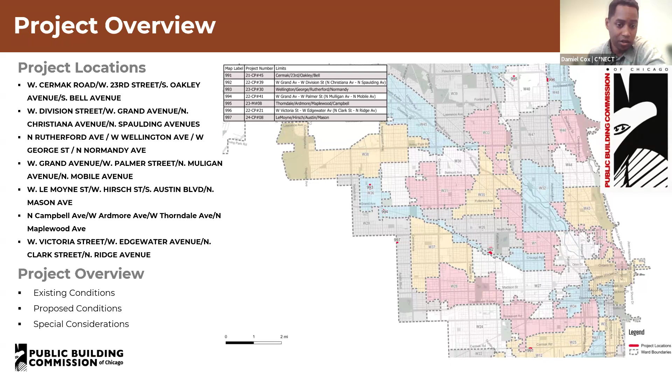Next, we'll start our technical review portion of the meeting. And I am going to turn it over to Damiel Cox, again from Connect, and he is the engineer of record, or the EOR, for CDOT. Damiel? Morning. So we have 7 alleys that we're going to go through. It's pretty hard to see, but every red dot is the representative location of where these alleys are located. You can go to the next slide. Okay.

Okay, the first one is Cermak Road, West 23rd Street, South Oakley Ave, and South Bell. What you'll see for a majority of these alleys is deteriorating pavement. Utility poles will also be located within the right of way. We're not doing anything with those. And then for this specific alley, it's mainly residential use.

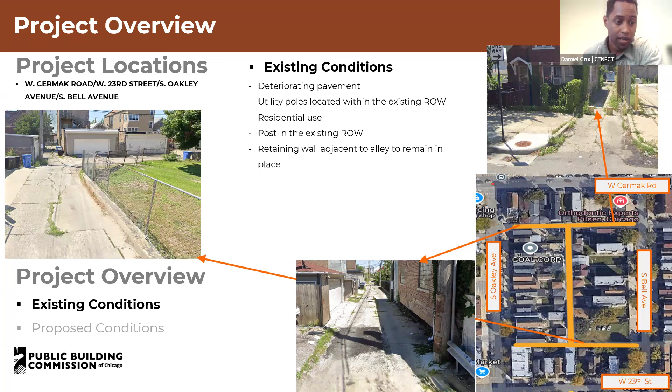We are proposing catch basins, manholes, and we are also using extra strength vitrified clay pipe along with ductile iron pipe. We will be tying into South Bell Avenue. So you can see it's from, did I not mention that? Oh yeah, we're connecting a 10 to a 12. So we will need a Y connection here.

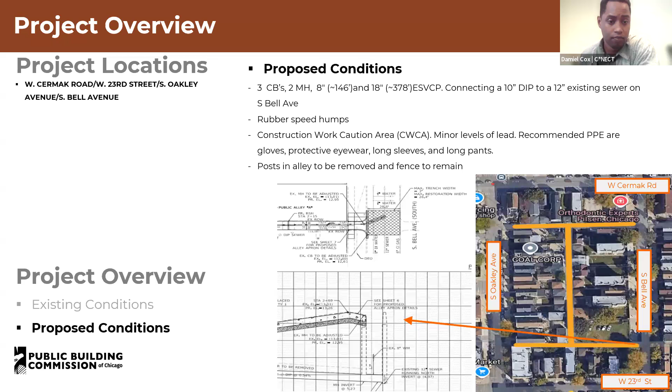No alleys on this list will be brick paver, just a heads up. You can go to the next one, D.

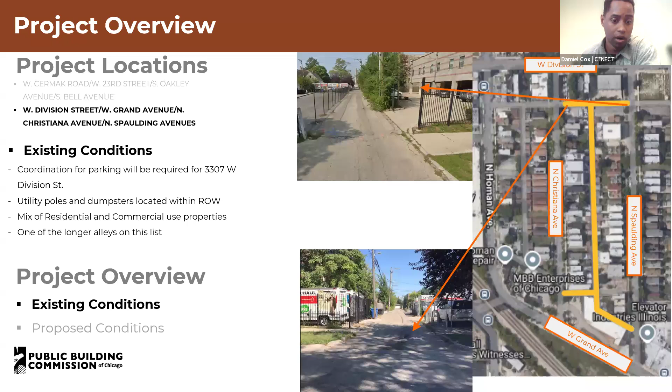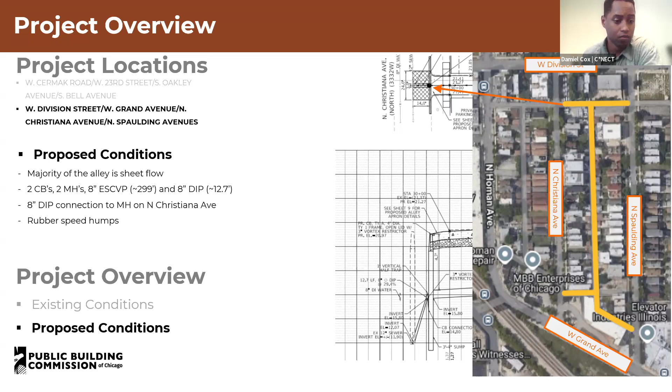Next slide. All right. Majority of this alley is sheet flow. We will have some extra strength vitrified clay pipe with some ductile iron pipe as well. We will be connecting to Christiana with 8-inch, and I think it's hard to see here, but we will be connecting the 8-inch to a manhole. Next slide.

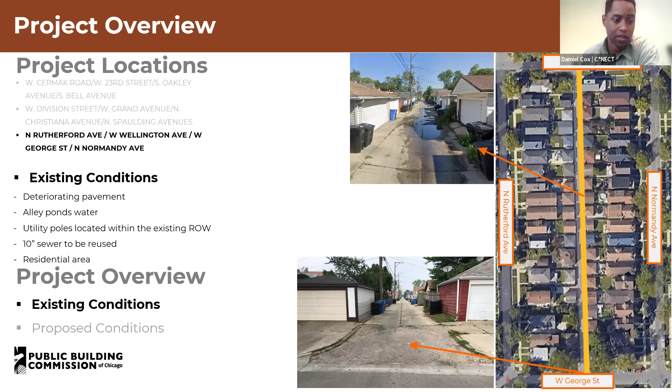Rutherford, Wellington, George, and Normandy. Similar to the other ones, deteriorating pavement. This alley is ponding water. It is noticeable on rain days. We will be reusing the existing 10-inch sewer, primary residential area. And then we're just proposing removing 2 catch basins and 2 manholes and adding some speed humps.

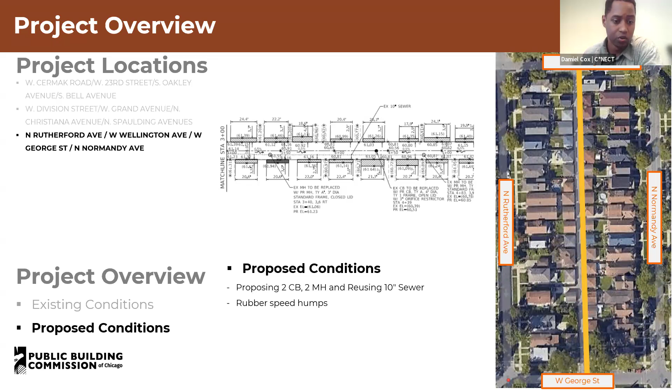Grand, Palmer, Mulligan, and Mobile. This alley is a mix of residential and commercial. Similar to the other ones, there are existing utility poles. On the topic of utility poles, if you do notice any of them deteriorating, since some of these photos were taken about a year or so ago, please let us and ComEd know as soon as possible. The earlier the better. You may notice some potentially leaning, but from our initial inspection, that was not present. But if you do notice this, if awarded with the contract, please let us know.

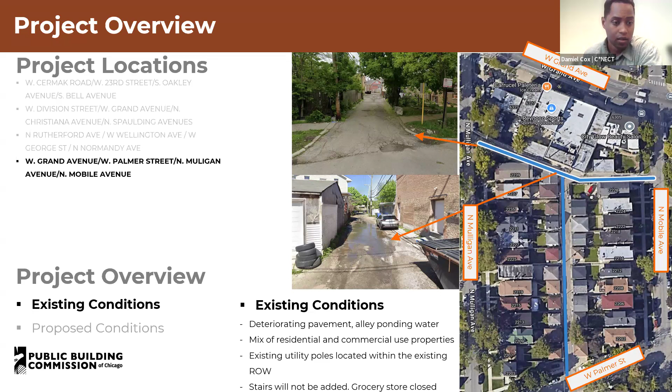Next slide. Proposing to use 2 manholes here and then replacing a 10-inch pipe with 30 feet of 10-inch extra strength vitrified clay pipe. Sewer lining will be needed here, so we will have some coordination with the water department, ideally so they can do it beforehand.

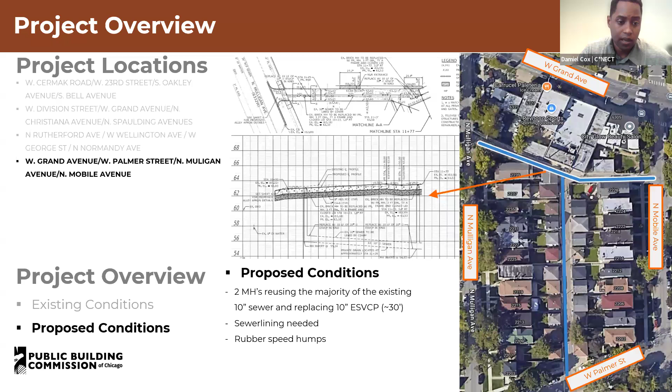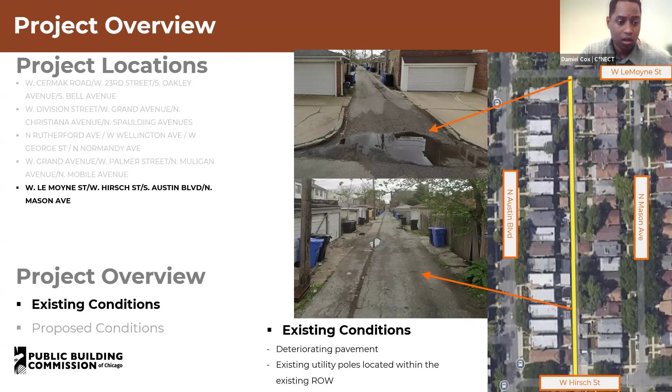Next slide. And then Lemoyne, Hirsch, Austin, and Mason. This alley is pretty straightforward, just deteriorating pavement. Alley is ponding water. Next one. We'll be introducing a manhole, 4 catch basins and then about 464 feet of extra strength vitrified clay pipe. And then we will be making a connection onto Hirsch Street, 8-inch to a 30-inch sewer.

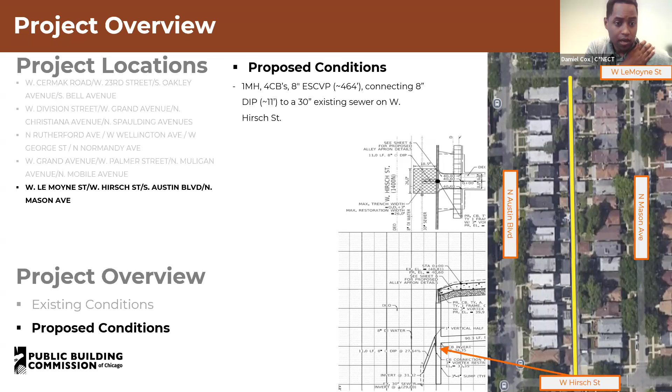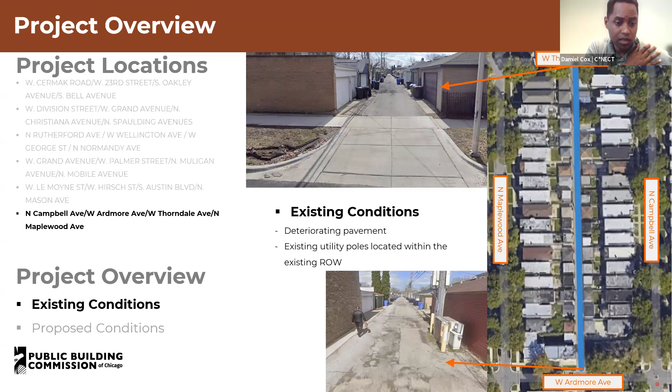Campbell, Ardmore, Thorndale, and Maplewood. Deteriorating pavement along with the other ones. Not much else to speak on here besides the photos you can see. This is the condition of the alley. And we're proposing 12-inch extra strength vitrified clay pipe along with connection of an 8-inch to a manhole on West Ardmore Avenue.

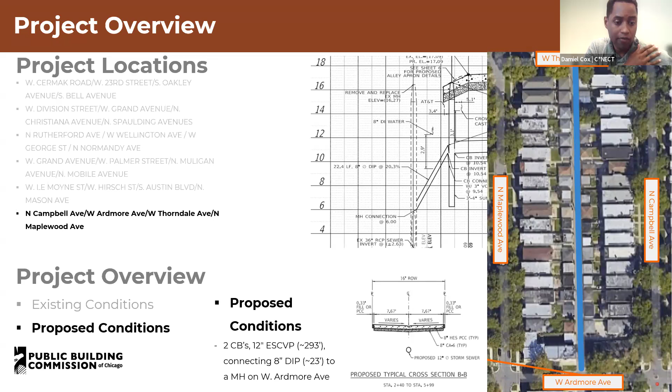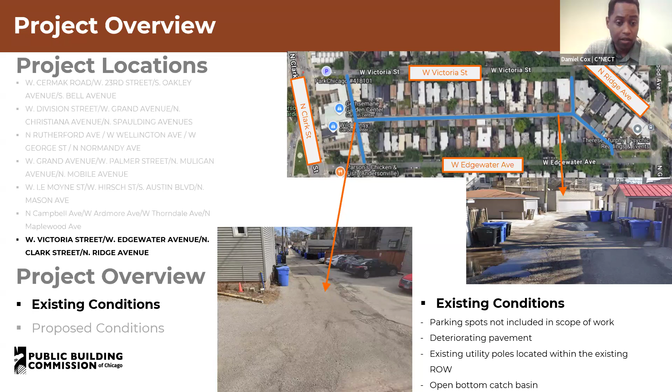Victoria, Edgewater, Clark, and Ridge. There is a parking spot not included in our scope of work in this alley. You'll notice it. We will be tying back into it, probably like a 2-foot HMA tie-in, and other than that, deteriorating pavement with open bottom catch basins. We're going to be reusing the 10-inch sewer and then replacing and adding in a catch basin, removing the open bottom catch basin.

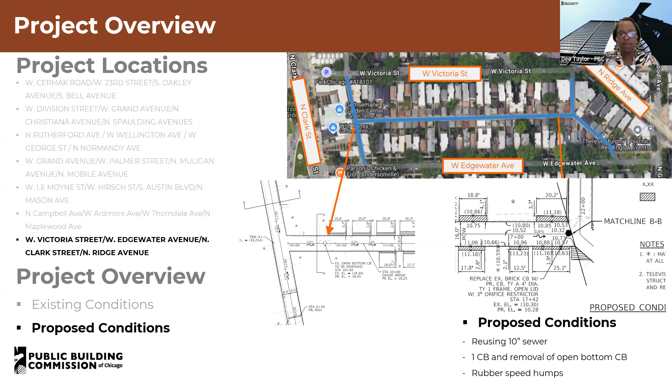Okay. Thank you, Demille. That concludes the technical review portion of the meeting. And just so everyone knows, we will have this PowerPoint presentation on our website within 24 hours. Okay. We have reached the end of the meeting. This is our Q&A portion of the meeting. Do we have any questions for any of the presenters today? Right now, Dee, there are no questions in the chat, and I do not see anyone with a raised hand.

Okay, thank you, James. Okay, well, this concludes today's meeting, our pre-bid and technical review meeting for a CDOT capital program, alleys, various locations, package 5, contract C 1626.